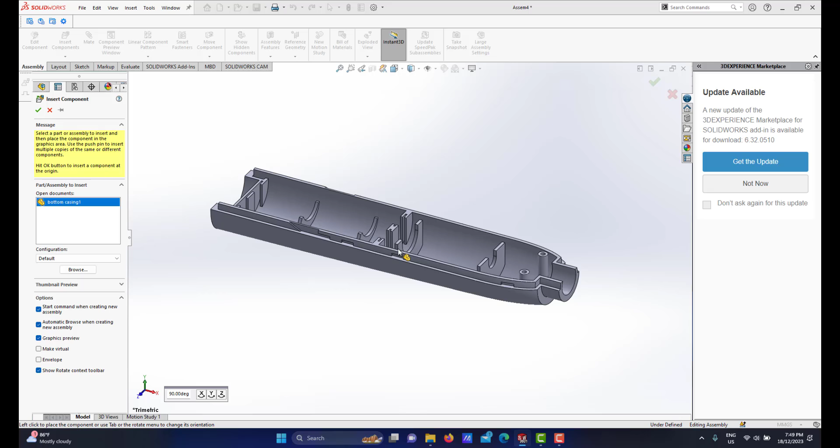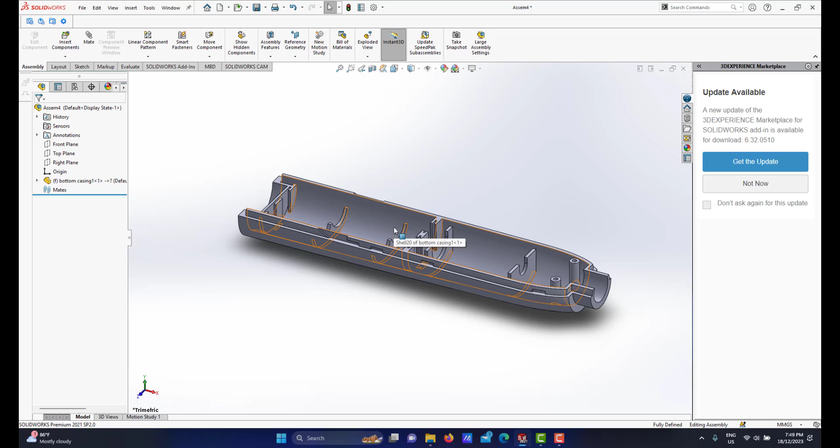Alright, for the first component, since this bottom casing will be the base, do not click anywhere on the screen. I will simply bring my mouse to the green tick button and click OK. This means the bottom casing will be inserted at the origin point, kind of like the 0, 0, 0 coordinate, because this will be the base of our assembly. The first object that we insert automatically becomes the base.

If you look under the list menu on the left here, we have bottom casing. It has bracket F. F means it is in fixed mode. Fixed mode means I cannot move it. I can move it by simply right clicking and going for float, but I will not do that.

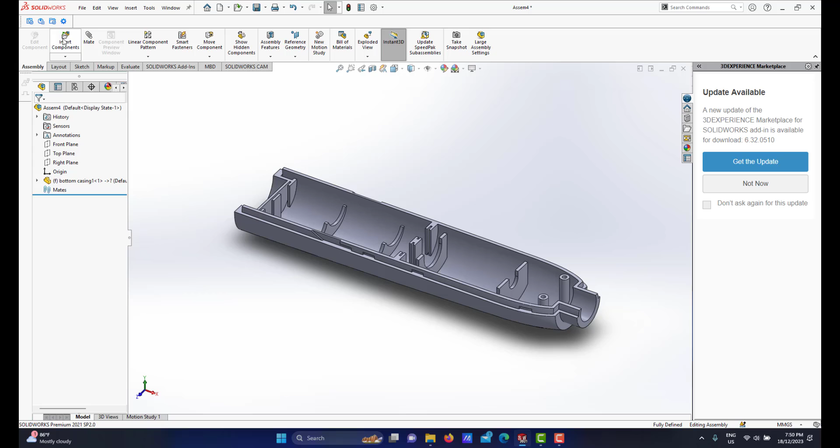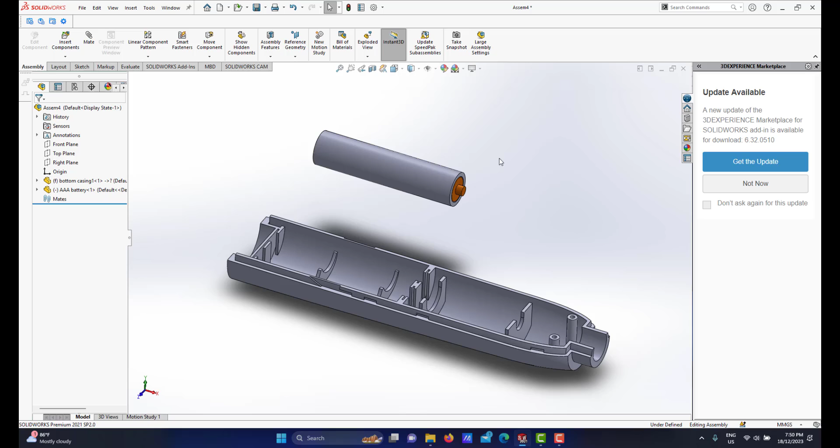Alright, the next component, as I mentioned in the order of the assembly, I will mount the two batteries here. So I will insert the AAA battery. Okay, I will click it here. Now I have one of these AAA batteries. Since I have two of them, I will click at the battery, hold down my control key, click at it, and drag it, and you can clone it. Right?

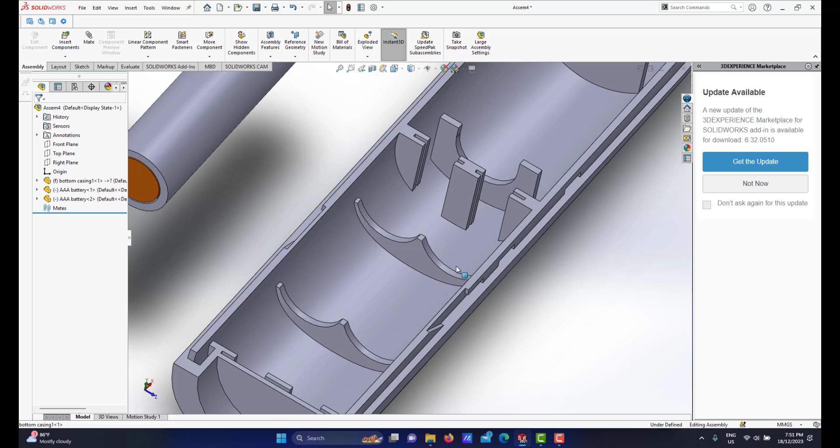Okay, now about assembling these AAA batteries to the right location. For the battery, I have the cylindrical surface, and the supporting rib here also has a cylindrical surface. So I will do mate settings for these AAA batteries. To do a mate, under the assembly tab, you have mate. I click at mate. Now the menu here is about the mate selection.

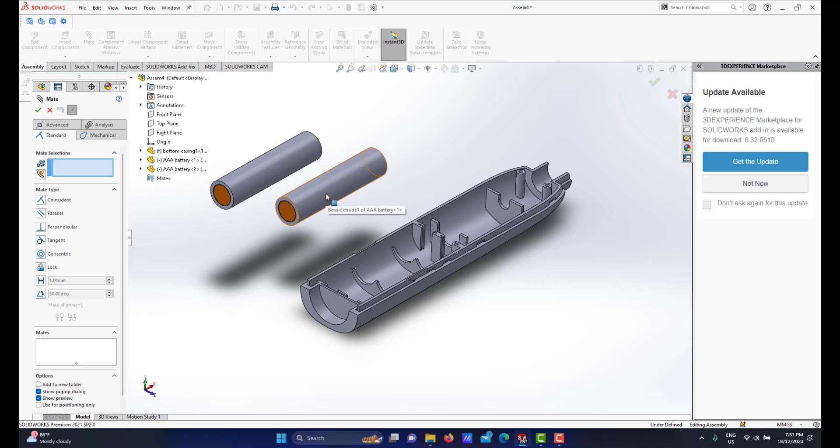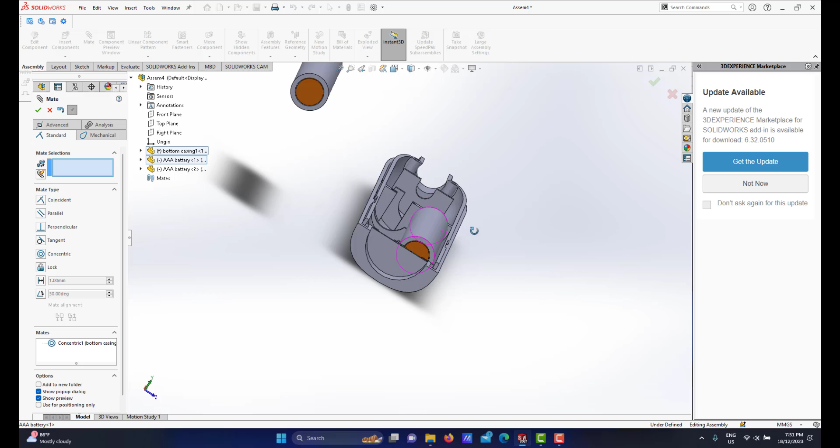I want to mate this first battery here. I will click at the cylindrical surface of this battery, then I will select the cylindrical surface of the rib. Automatically SolidWorks will apply the mate, and I click OK. So I have the first mate. It automatically has the concentric relation, so they are in concentric position. Now I can simply drag this battery, but it still remains concentric with the cylindrical surface of the support.

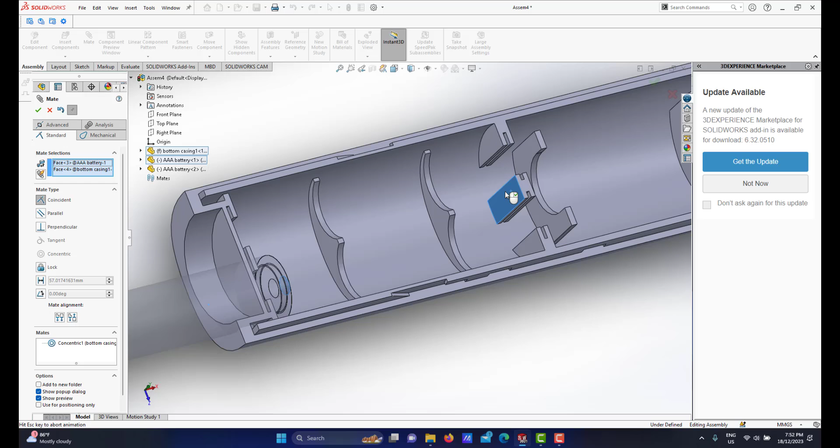All right, for my next mate, this flat face of the battery will be in line with this flat surface of the rib. Then I click OK. Now you can see my battery is in position. All right, for the next battery, I will go for cylindrical surface with the cylindrical surface.

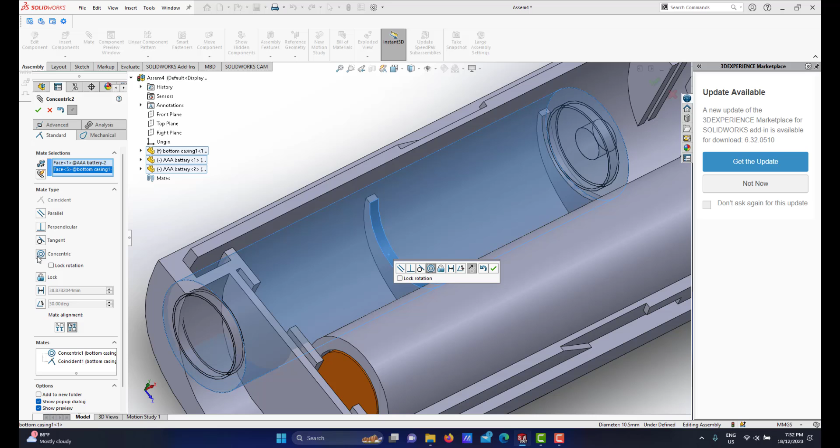So automatically it will go, if you look at the menu, it will go to concentric. Then I click OK. Then let me drag this position first. All right, this face will be in line with, since the next battery will be on the other side, will be in line with this. But I'm not using this direction. The orientation is on the wrong side.

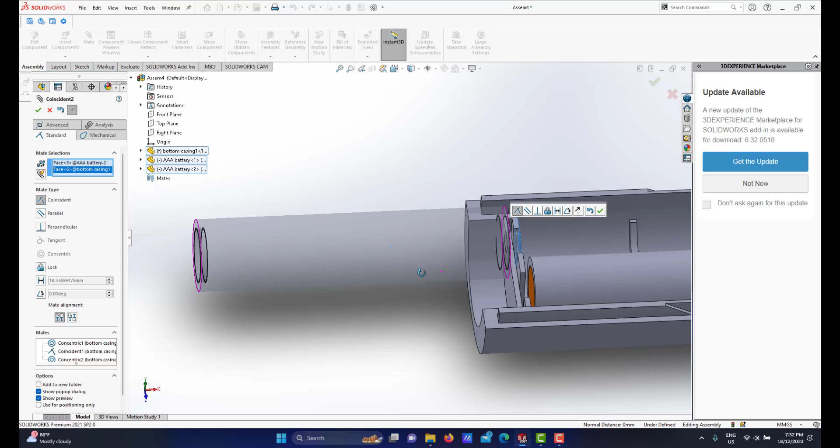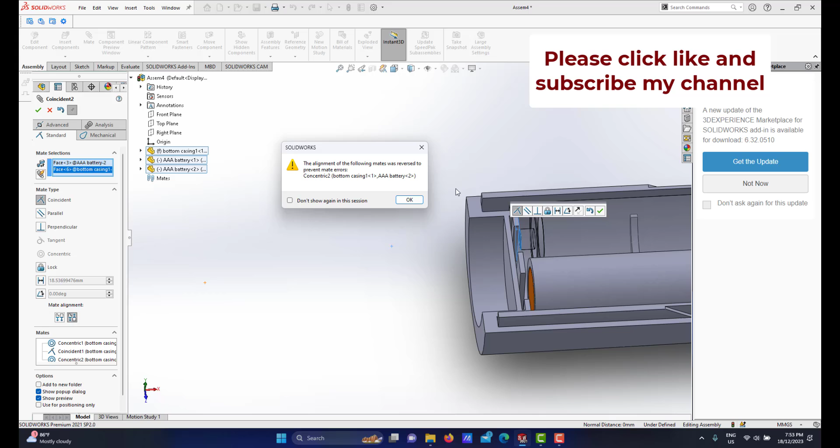So under here, the mate alignment menu on the left at the bottom, by default is using align. If you bring your mouse here, it goes for anti-align. I'll click the next one, and I ignore this message, since it will appear if I have already done the assembly from the old file of all these components. So I just simply click OK. So it means that the next battery is in position. All right, let me click OK first. Now I've done mate setting for the two AAA batteries.

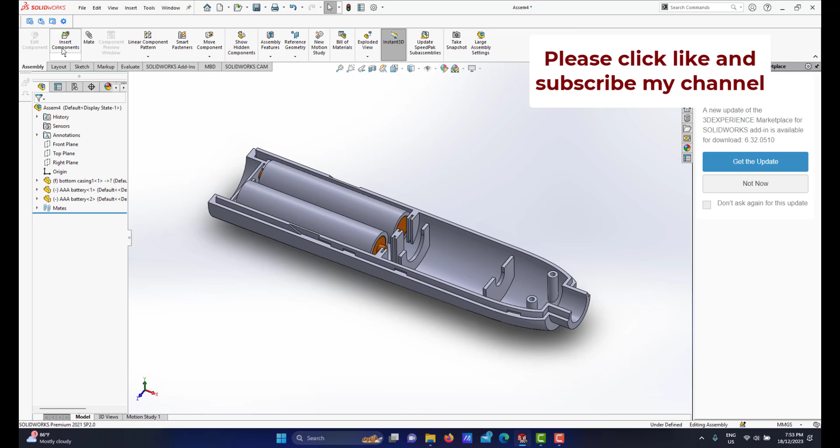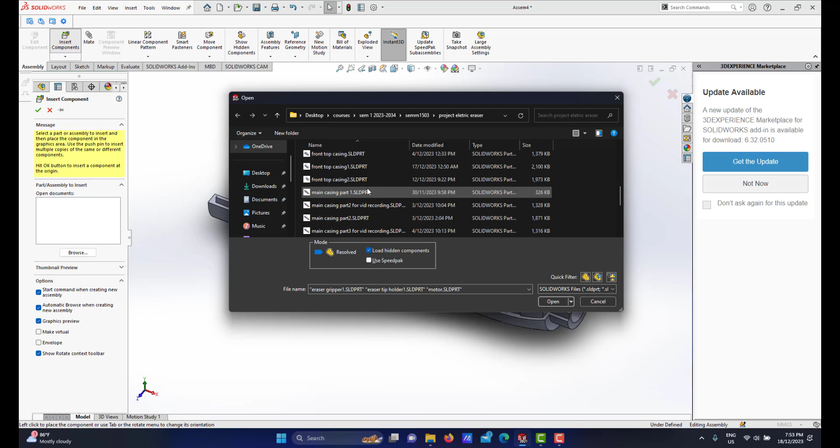The next components: I will insert the electric motor, the eraser tip holder, the gripper, and also the rubber eraser itself. So I will go for assembly, insert component. I can select more than one. I can select the motor, the eraser tip holder one and the eraser gripper one. This is the gripper, this is the tip holder, and this is the electric motor.

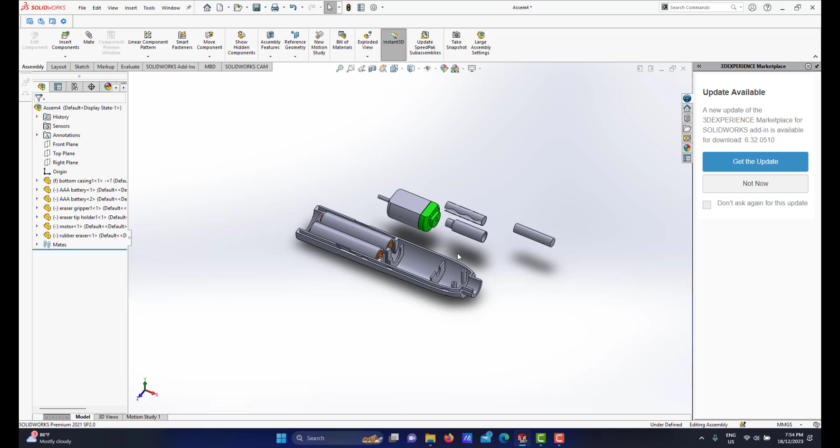Another component is the eraser itself, the rubber eraser. The rubber eraser will be here. The first mate setting I will do is for this motor. Let me bring all these components to this side. Let me bring the motor like this. For this motor, I will do mate setting.

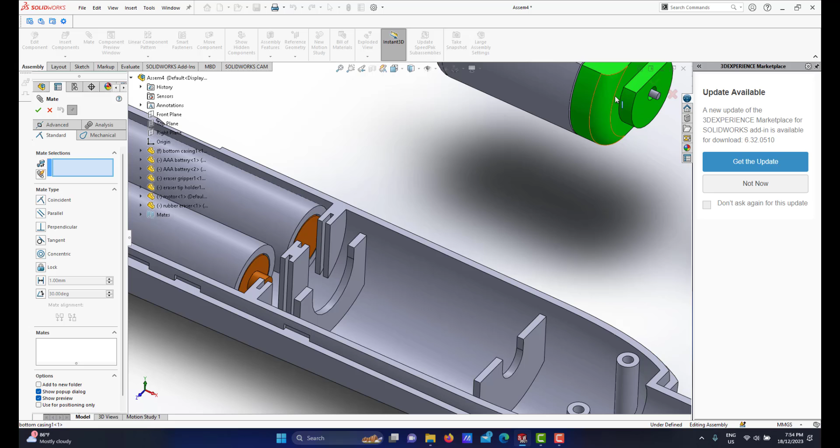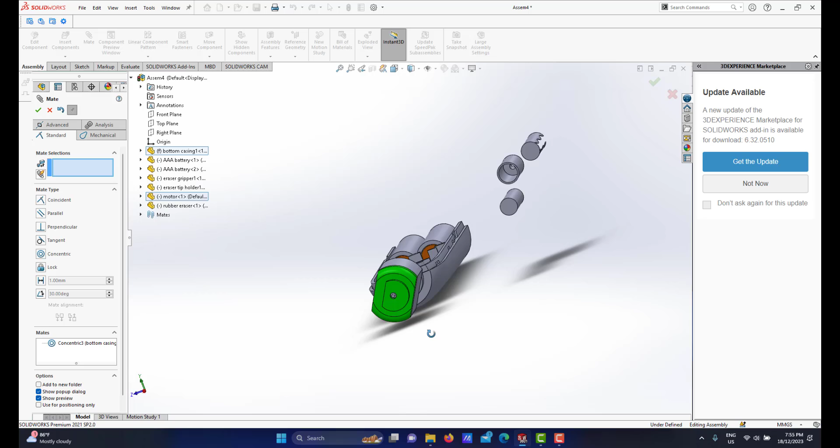If you look at the motor here, we have a cylindrical surface, and at the back we have a rib to support it, which also has a cylindrical surface. I select this cylindrical surface and that cylindrical surface, so automatically it will go for a concentric relation. I can drag the motor as you can see, but it still remains concentric. The orientation of the motor can still turn, I can rotate it like this, but I don't want it in that orientation.

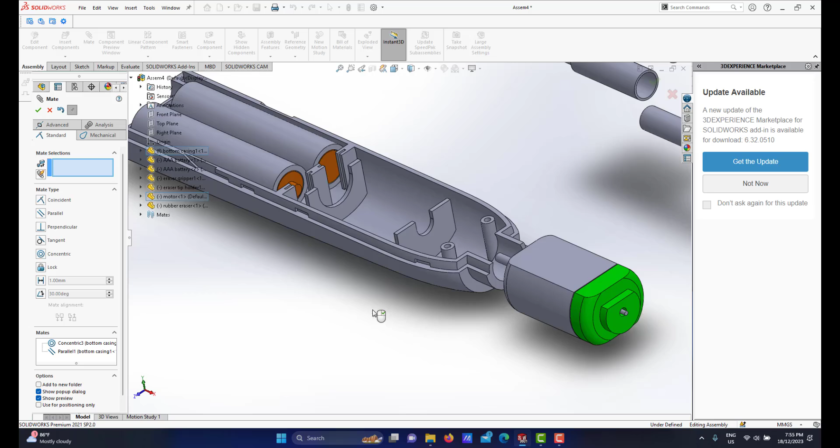My mate setting here: this flat surface of the motor and this flat surface here. If you look at the window, it goes for parallel, so the motor is parallel. For the other mate setting, this flat surface at the back of the motor must be in line with this. But the orientation of the motor is on the other side, so I will go to the mate alignment, go to the next one, anti-align.

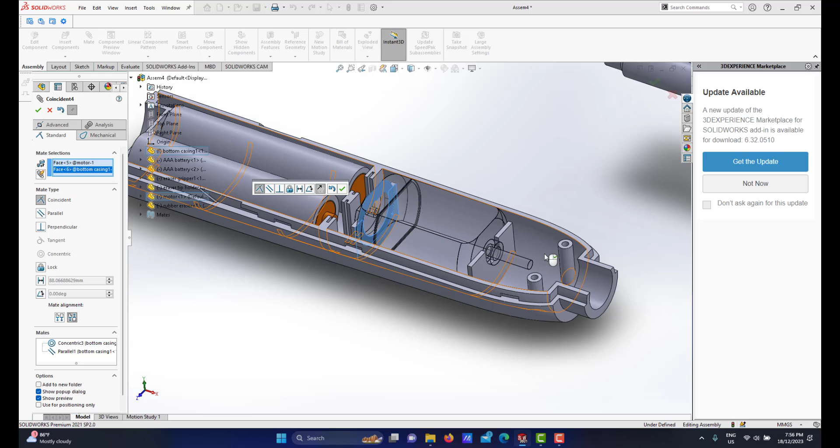I ignore this. This appears because I have done assembly from the old file, since I do part modeling from assembly mode. I just simply click ignore and click OK. So now, as you can see, the motor is in position. I've done the motor.

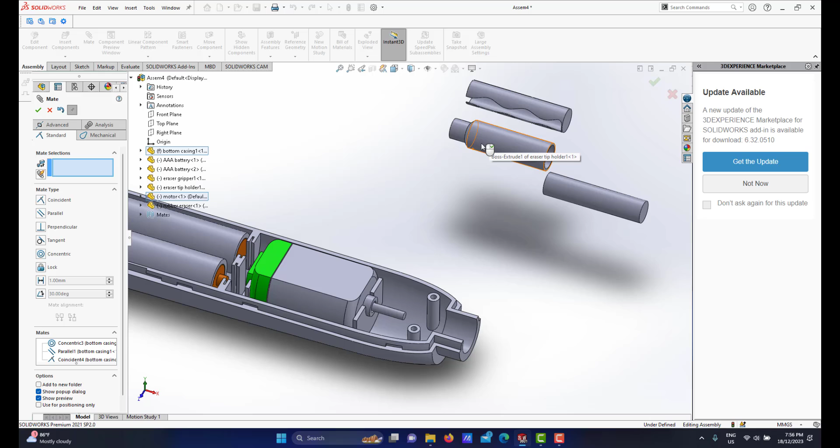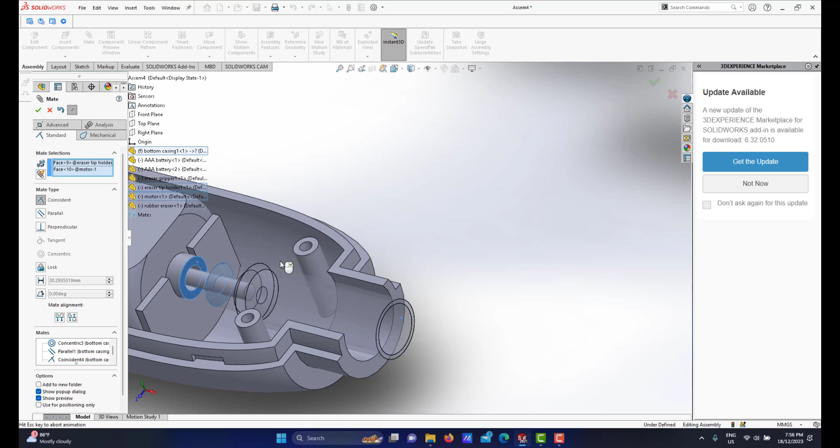The next one will be the eraser tip holder. The eraser tip holder's cylindrical surface has the same concentric relation with this. I can still drag it. And this face will go here. Just click OK. Let me click OK first. Now the eraser tip holder is in position.

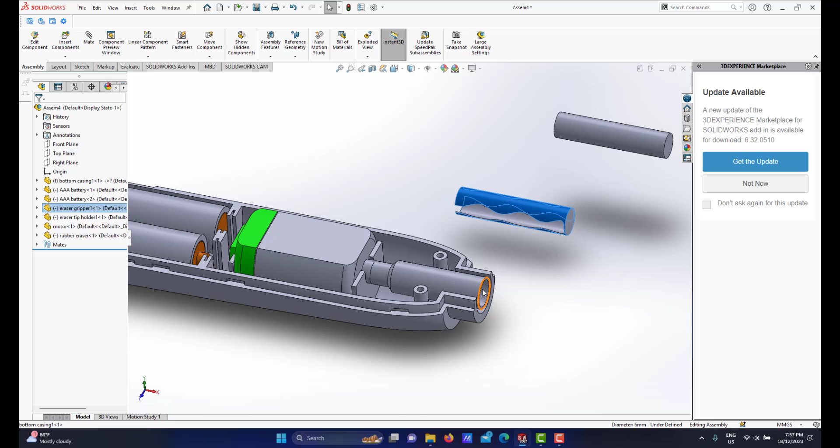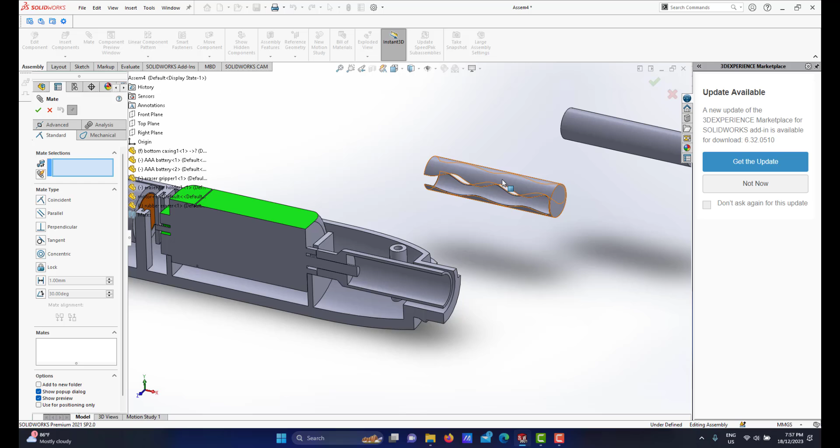The next mate setting will be this gripper, which must be inserted inside the eraser tip holder. In order to bring it up, I need to go to section mode, so it's easier to select the inner surface there. This eraser gripper has a cylindrical surface, so this cylindrical surface and this inside go for concentric. Click OK. I can drag it.

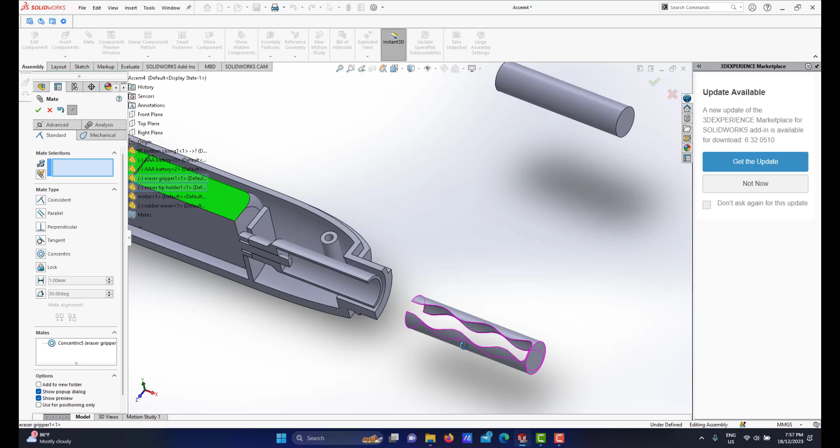As you can see, the orientation of the cutting slot of this gripper is not the right orientation. Let me drag it like this. To fix this, I need to make the orientation of this cutting slot in line with the top plane. To do that, if you look, we have the list on the screen here. This file is called eraser gripper. This is the eraser gripper listing.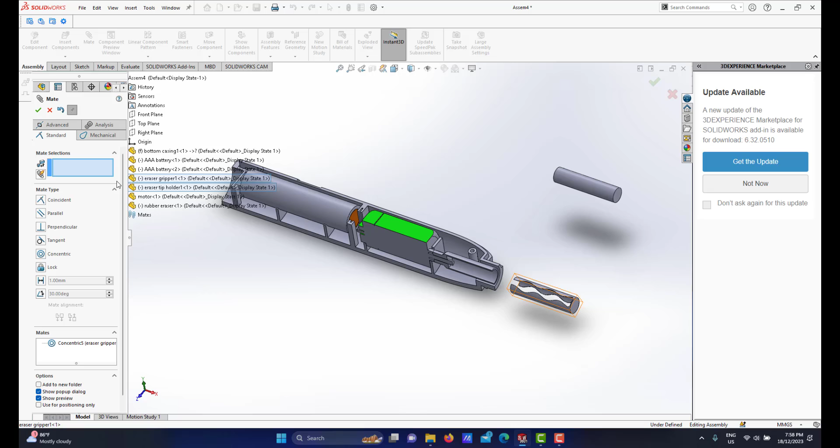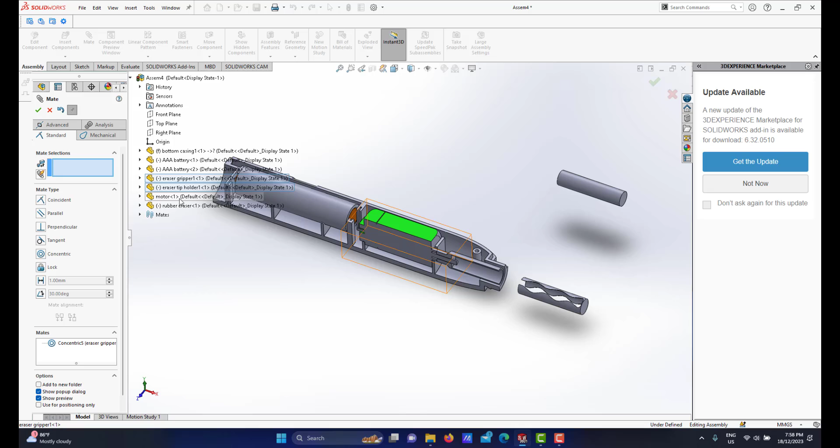Okay, I can drag. By the way, this screen is kind of like... Let me go back to all of this. All right, then I can see the arrow. Here the eraser gripper. If you click at the arrow, you will open the list here. The top plane of the eraser gripper will mate with the main top plane, as you can see. Then I click OK.

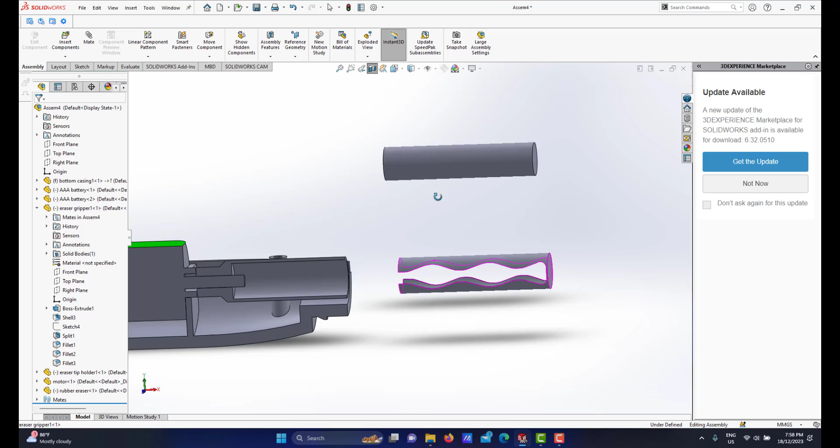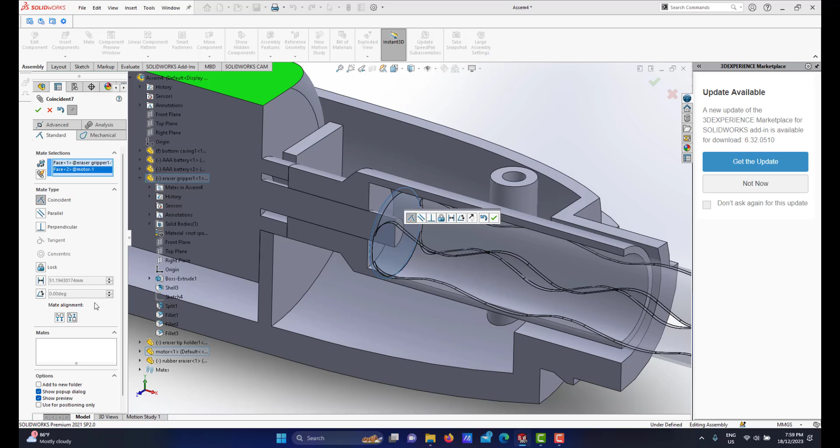I click OK first. As you can see now, the orientation of this cutting slot here is in line with the top plane. I go for another setting for this gripper. This gripper here, the back face must touch the end of this electric motor shaft face. I do not click OK. I go for anti-align. Just simply ignore this message.

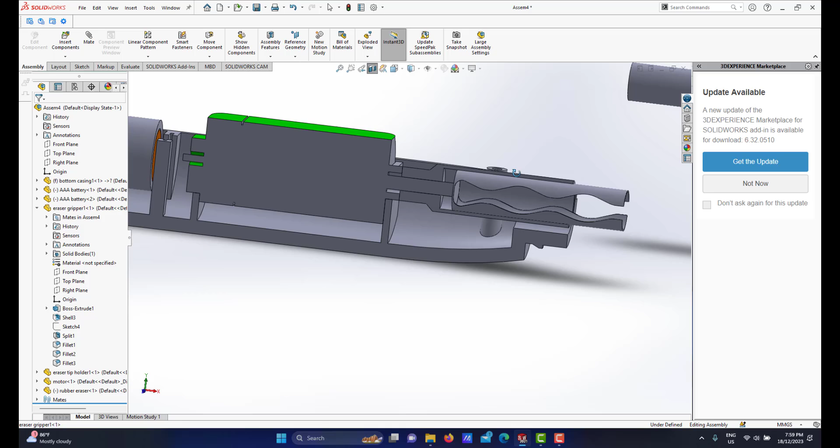Then I click OK. This message will appear if you have done assembly before, and it will warn you. If you make a fresh new assembly, this message will not appear. I have set it, click OK. Now my eraser gripper is in position. The next one will be the rubber eraser. I go for mate. The cylindrical surface here will go there, concentric.

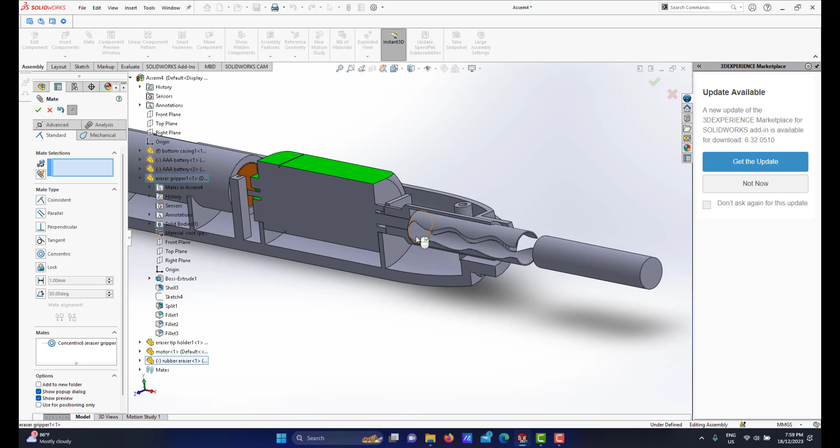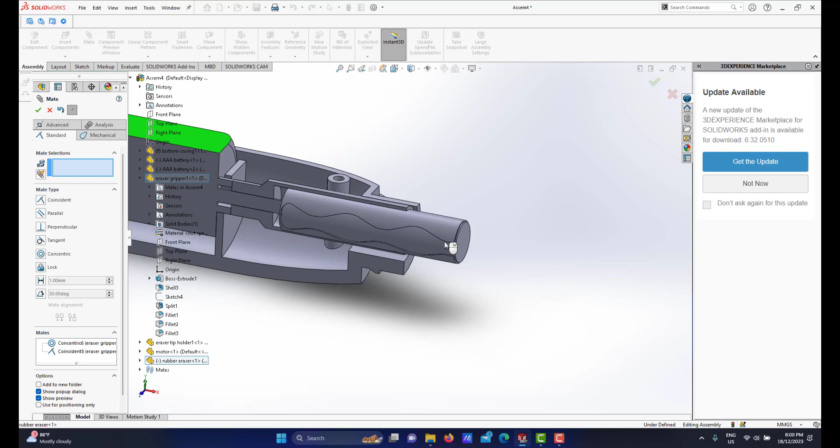For this eraser, I cannot make this face really touch the back surface, because if I do that, let me show you. If I go here to here for coincident, if you look at the outcome, we don't have excess of this eraser to do the erasing. So I need to edit it. Let's say I simply click OK. How do I edit the mate setting? I need to put a certain distance.

If you look at the menu on the left here, we have mates. All our mate settings are recorded here in the list. The last one that I set, you can see the coincident between the surface of the rubber eraser and the back surface. If I click at this setting, sometimes the cursor moves, I click at it and I edit feature.

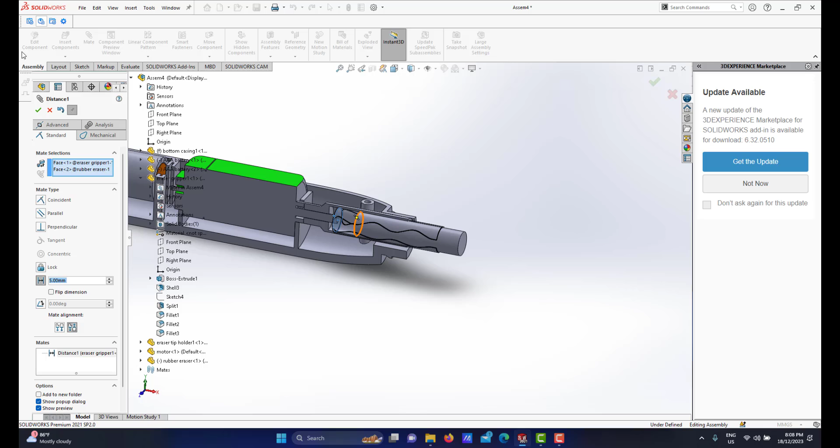Then it will go back to our mate setting here. We can edit it. As I said just now, it is in coincident mode, but I can put a distance here. Let's say I want to put a distance of about 5 millimeters. As you can see, we have a distance of 5. This is how we edit our mate setting. Let me click OK first. And now we have access for the eraser to do the erasing works.

Let me turn off this. Let me save my assembly. I will simply replace the file.

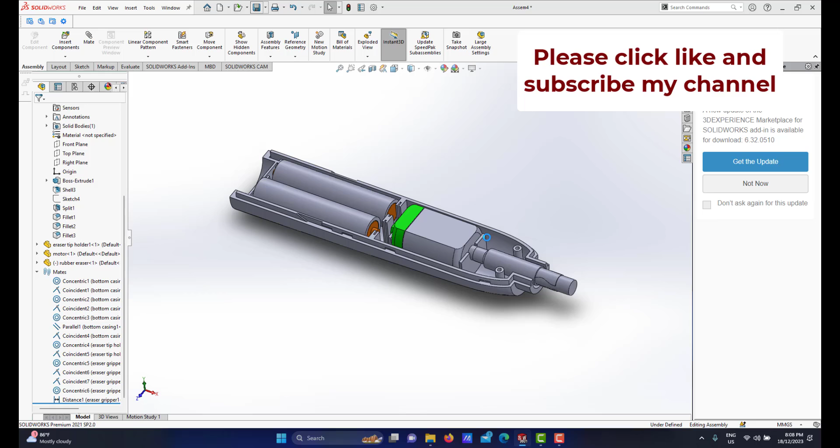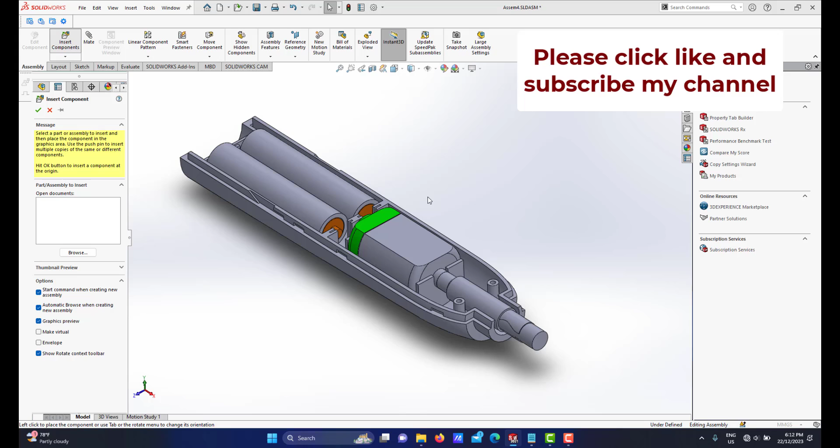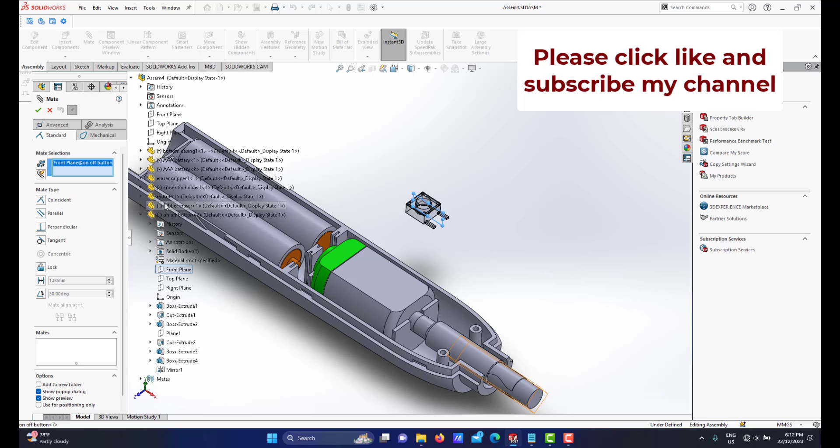The next thing to do for the inner components of this electric eraser is the tactile switch, or I call it the on-off button. So I will insert the on-off button. I put it into this position for a while. To do the mate, I will select the front plane of this on-off button, and it mates with the main front plane. So it is in position.

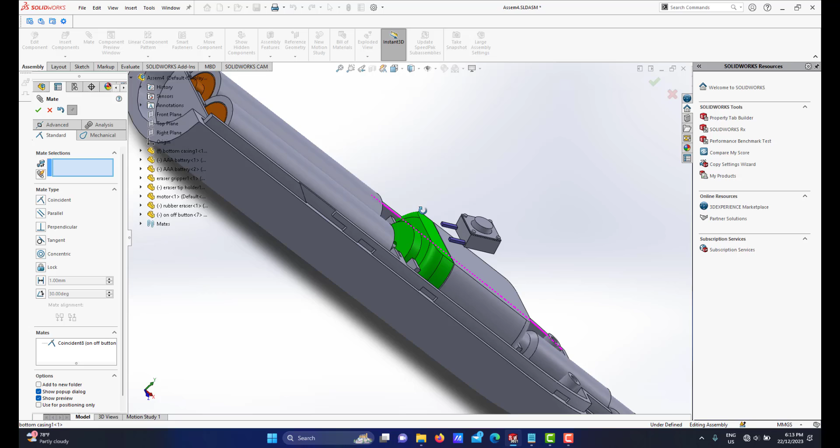Before I click OK, under mate alignment, I go to anti-align. It means it turns to the other direction, because we need the connector facing this direction. The next setting will be this face touching this face, coincident. And the last setting, from this face to this face, I will set a distance of 2.3 millimeters. Then I click OK.

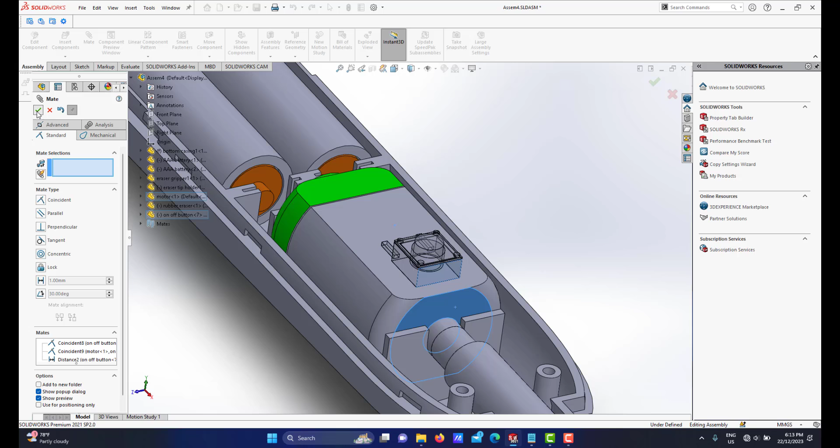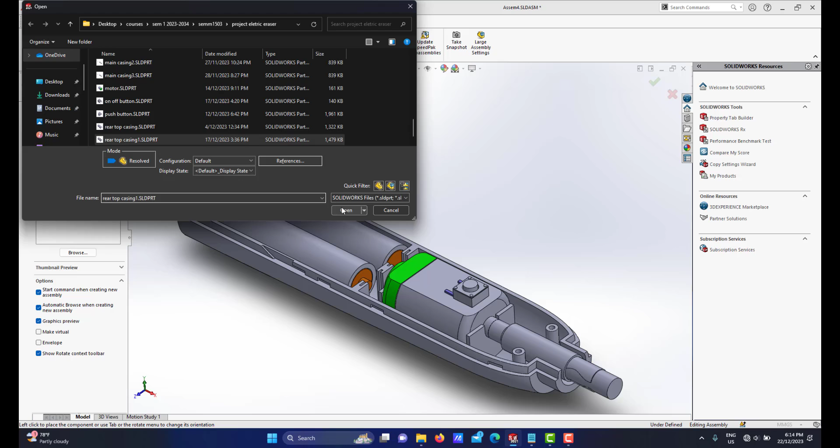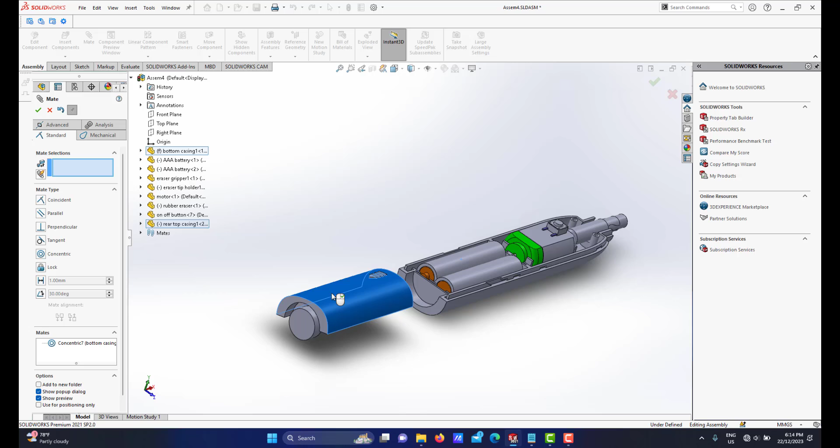So the tactile switch is in position. That is all the inner components of this electric eraser. The next thing is I will insert the rear top casing. This is my rear top casing. Let me drag it upward. For the mate, since these are cylindrical faces, it will mate with the cylindrical faces, concentric. I can drag it like that, and it can even be turned like this.

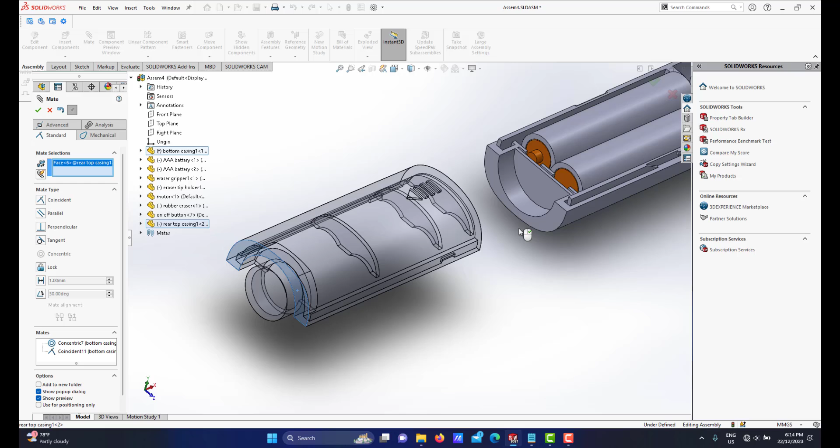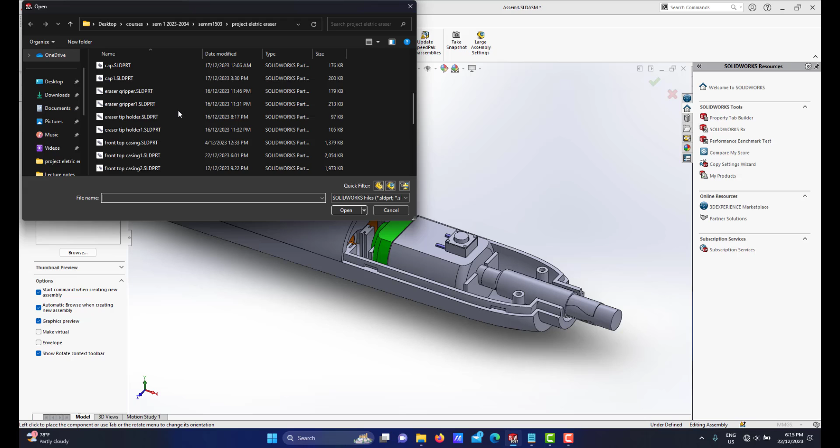The next setting will be this. Let me cancel this thing. This flat surface will mate with this face, so it will be coincident. And the last setting is this face in line with this face. So this will be my setting for the rear top casing. Next, I will insert the front top casing. Front top casing 1. So this will be my front top casing 1.

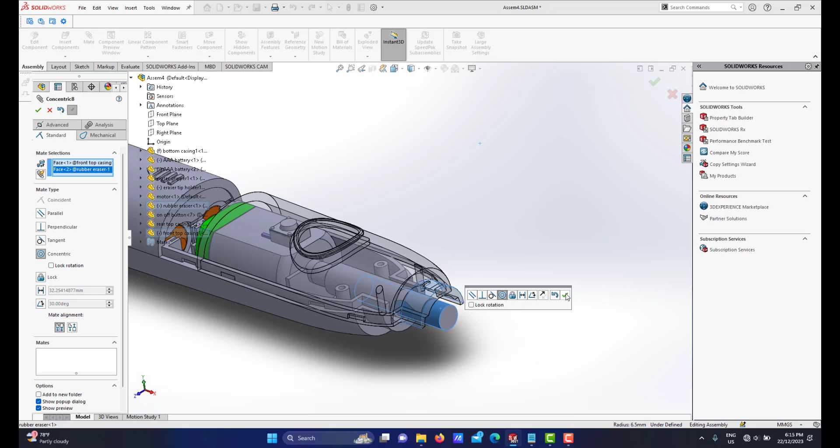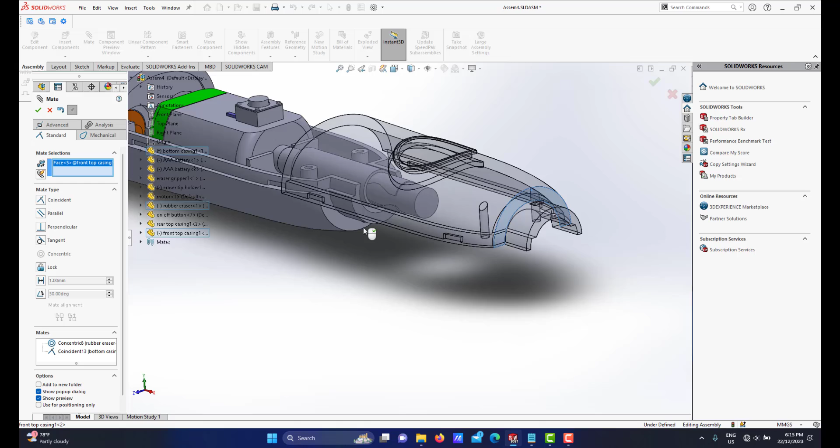The mate for this is that the cylindrical surface will mate with this cylindrical face. I click OK. Let me drag like this, and this flat surface will mate with this surface, so it will be coincident, and this face and this face will be coincident. So I have this. Let me click OK first. The next thing to do is the push button. I have the push button above here. So insert the push button.

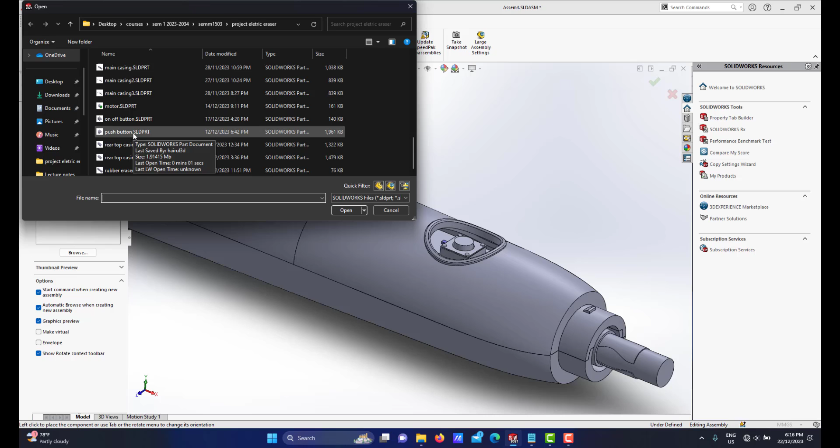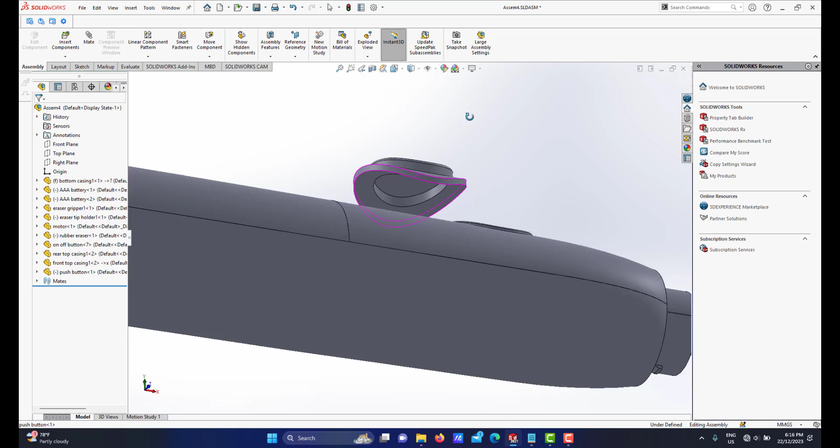The push button. All right, so this is the push button. For the push button, to put it in the right position here is kind of difficult, because I don't have any kind of cylindrical surface. Okay, if I go for mate, the first thing I do is that I will go for this push button.

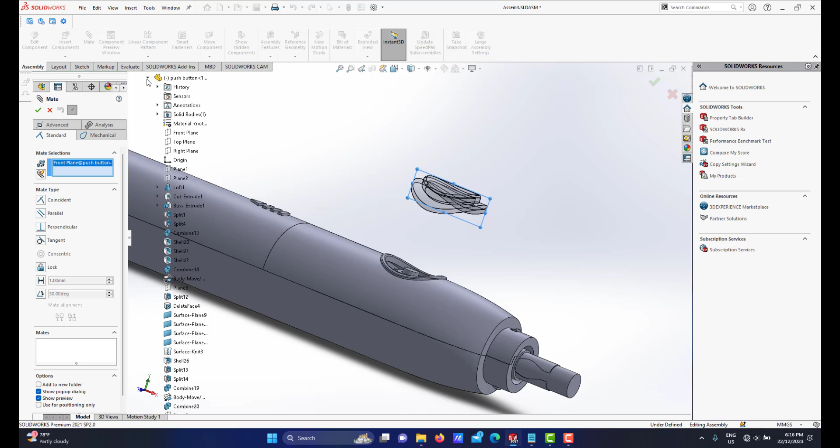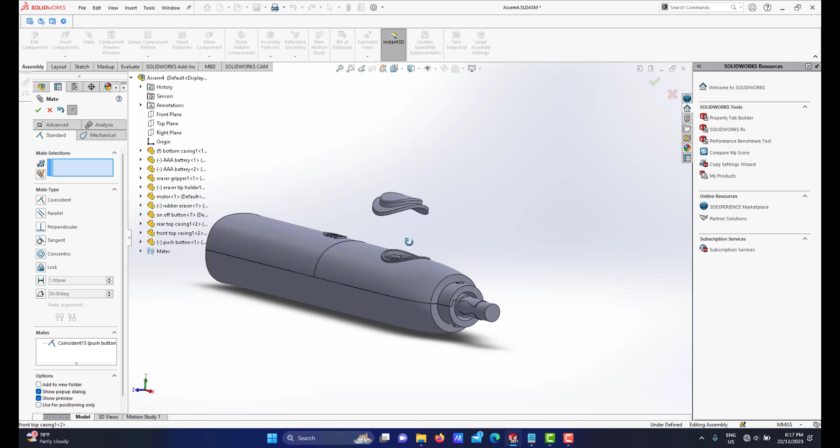If you look here, the list that we have on the screen, the front plane of the push button, let me close this list, will mate with the main front plane. So let me click OK first, just to show that this push button is in the middle position. All right, about how to put this push button in the correct position on top of here. To do that, let me click OK first.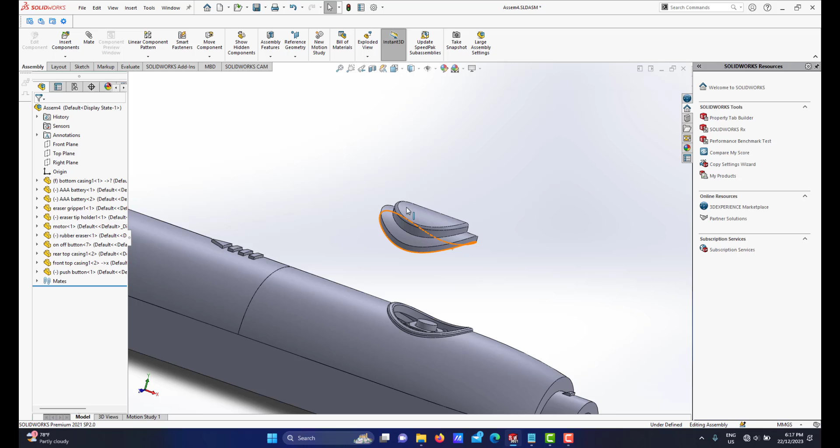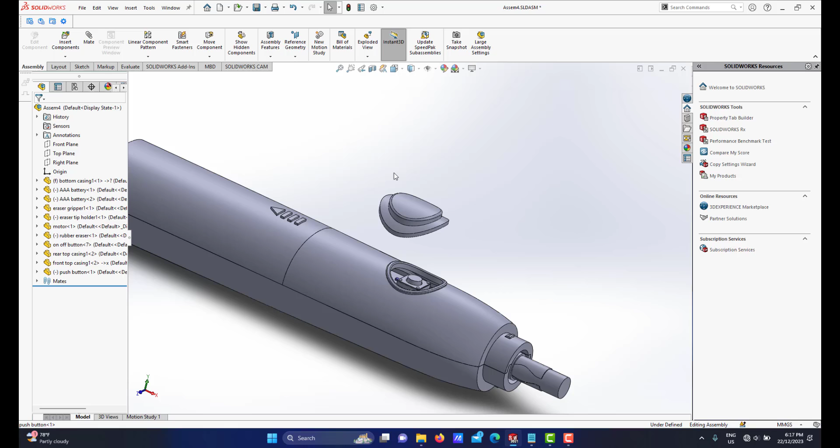Because of the way I did the part modeling for this push button, I have a circle where I do the split. That circle I should turn on in this push button file so that it mates with this front top casing. This push button is part of my part modeling of my top front casing, where I have the same circle that I used to make a split. So that circle, that sketch, must be shown in this assembly. That's why I can use both sketches for my main assembly. Let me show you.

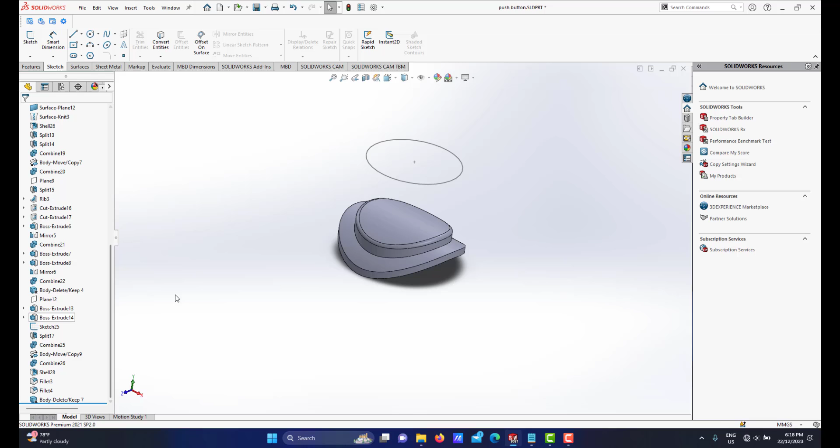To do this, I will open this push button file. If you look at the feature manager here, the sketch that I mean is this sketch 25, which I used to do the modeling of this push button. This sketch I need to be on, it must be shown. And if I go back to the assembly mode, as you can see, we have the sketch of this push button, the circle here.

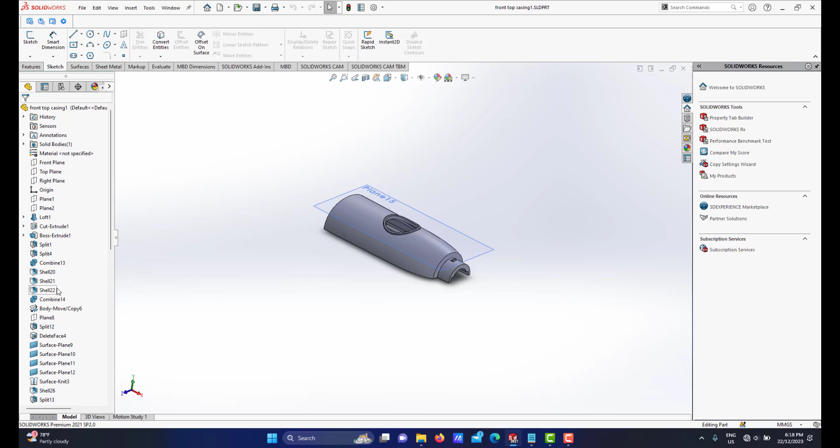Same goes for this. I open this front top casing. I will turn on the same sketch like the one I showed for the push button. If I drag down here, the sketch is sketch 25. This one also has to be shown. If I go to the assembly mode, as you can see, we have both sketches here, the circle for the front top casing, and the push button circle on top. So I can use both of these circles for my mate setting. Let me show you.

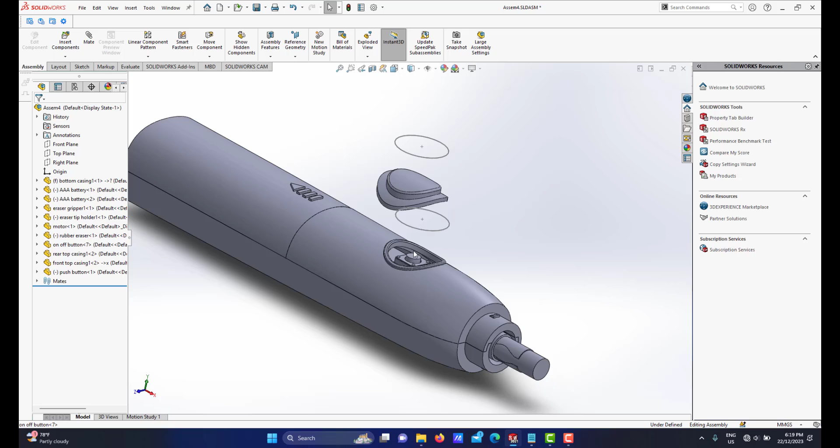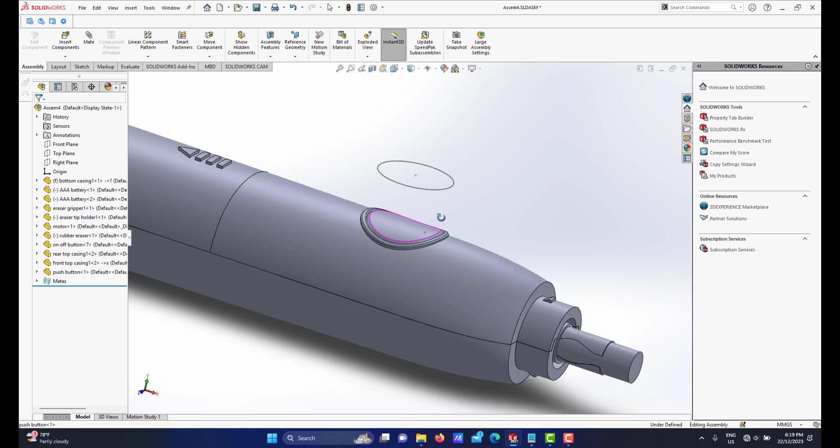Under the mate here, I will select this sketch and this sketch to be coincident. I click OK, then I click OK here. So now our push button is in position. Let me check in the section view. So it is in correct position. That's how we do the mate setting of the push button. Let me save my file first.

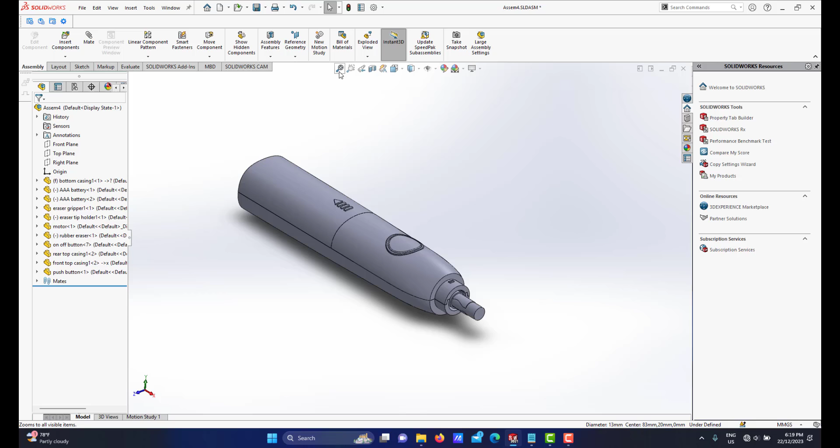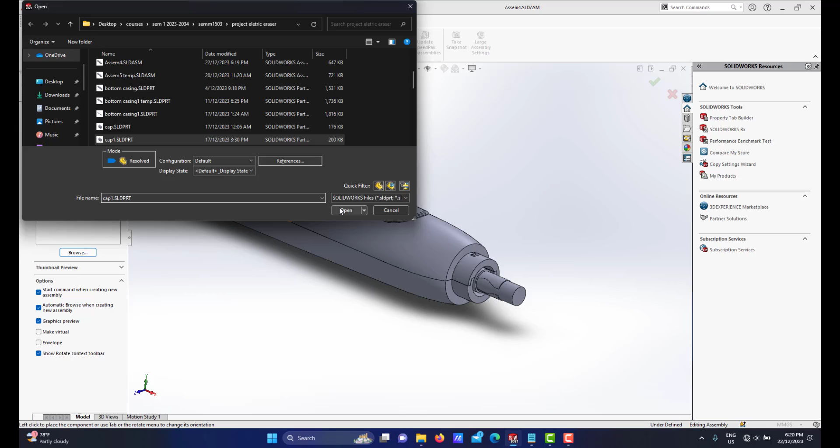Okay, if I don't want this to be shown, I can hide this sketch. Even for this, we have two of it, I can hide it. Let's zoom to fit. I save my file. The last part. I have already put the on-off switch there. The last part is the cap. So for the cap, I insert the cap. Where is it? Cap 1. Okay, I have my cap 1 here.

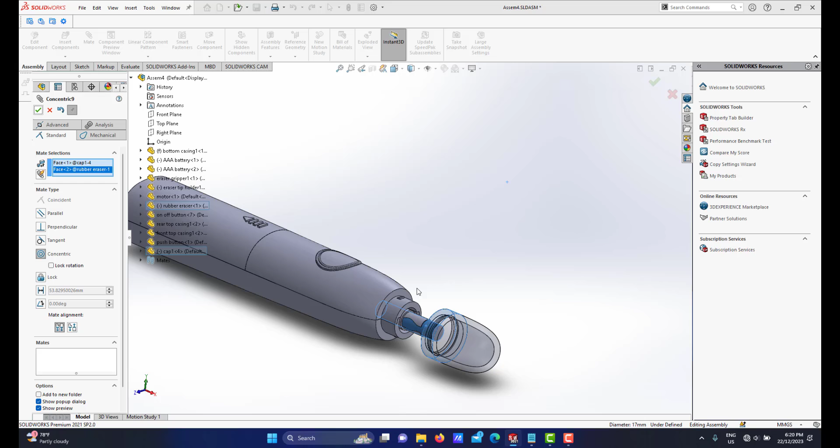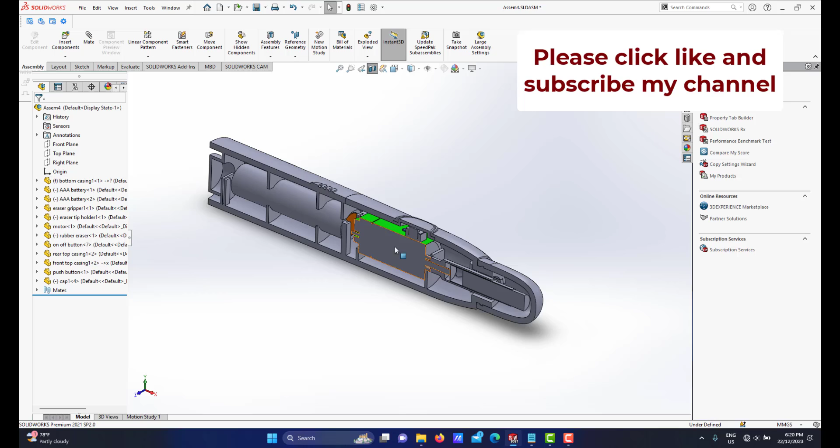For the cap, we simply do cylindrical surface, and here I can go for anti-align to the other direction. I click OK for this setting. Then my next setting will be this face will touch this face. Let me click OK, and OK. I believe I have finished the assembly. Let me do the final check by section view to check whether we have any interference. It looks like every component is in position and there is no interference. Let me zoom extend.

Alhamdulillah, I believe I've completed all my parts for this full assembly of this electric eraser. Inshallah, in the next video, I will show you how I do the assembly drawing of this assembly file, and later I will show you the exploded drawing and so on. Thanks for watching this video.